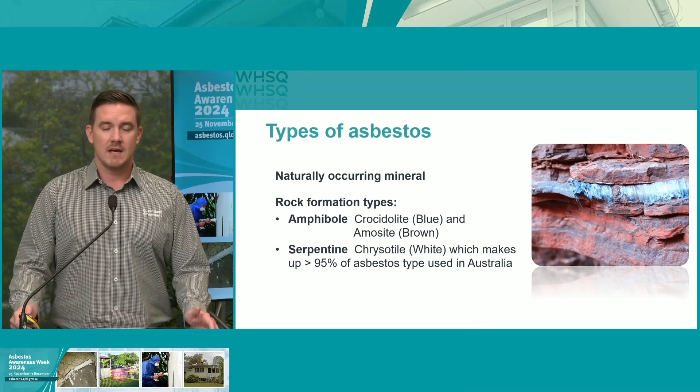So what is asbestos? So asbestos is a naturally occurring mineral. We find this all around the world, including here in Australia. We have 2 specific fibre groups. We have our amphiboles, which are our straight, needle-like asbestos fibres. And within this group, we have crocidolite and amosite, otherwise known as our blue and brown asbestos. And then we have our serpentine fibre group, which are our curly, wavy asbestos fibres. Within this group, we have chrysotile, which is otherwise known as our white asbestos.

So why was asbestos used in building products? So essentially, it was an easily acquired natural resource with many unique properties, including great flexibility, high tensile strength, the ability to insulate from heat. It was non-conductive to electricity and chemically inert, and it was also really affordable at the time. We do know that there's over 3,000 asbestos products, and asbestos can be present in 1 in 3 Australian households.

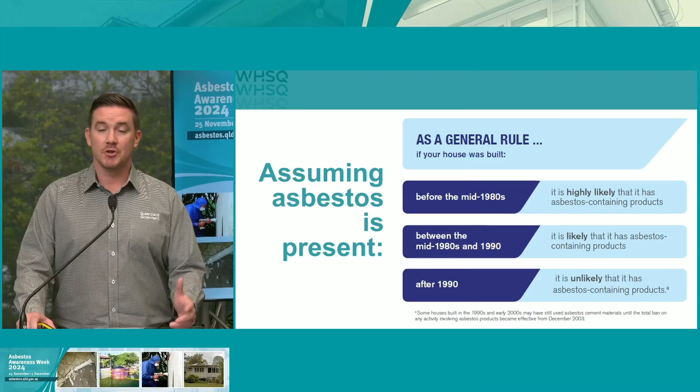So as a general rule, if your property was constructed prior to the mid-1980s, we say that it is highly likely that asbestos will be present. If your property was constructed between the mid-1980s and 1990, we say that it is likely that asbestos will be present. And if your property was constructed after 1990, we say that it is unlikely that asbestos will be present. Now, I should note that the total ban on asbestos came into effect on the 31st of December 2003. So if your property was constructed between this date and 1990, there is a small possibility that asbestos may have been introduced into your home during construction.

Now, when we're looking around our home to determine what could be asbestos, there's a number of things we could look towards. So we have the age of the building, which we just discussed. We also have the era of renovation. So if you have a 1920s or 30s cottage, for example, and you had extensive renovation between the 50s to the 80s, there is a possibility that asbestos may have been introduced into your home during that process. We also have the manufacturer's labels, which you can see in the image on the bottom right-hand side there.

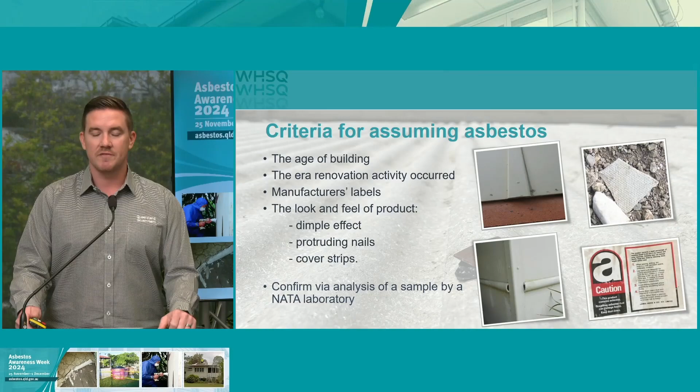These may be placed on the back of some of your sheets at home. We also look at the look and feel of the product. On the left-hand side photos, you can see those cover strips which are indicative of an asbestos product, and also you can see those nails sitting quite proud, which is indicative of a harder asbestos cement sheet. In the top right corner, you can see a fragment of asbestos cement sheet with that dimple pattern, otherwise commonly referred to as golf ball effect or honeycomb, again relatively consistent with asbestos material.

It's important to note that if we're going to be doing any renovations, we must sample any suspect materials and have them analysed at a NATA-accredited laboratory, whether that's going to be your builder, who you need to see proof of those samples from to confirm what's happening, or if you're taking them yourself, you can take them down to a NATA-accredited laboratory.

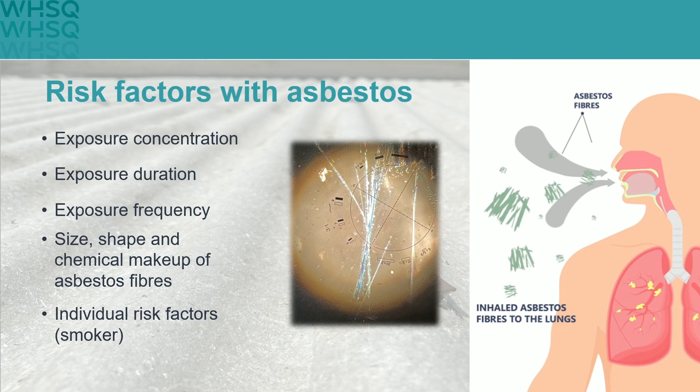There are three main asbestos-related diseases linked to the inhalation of asbestos fibres: asbestosis, lung cancer, and mesothelioma. Now, these are all linked to our exposure concentration, exposure duration, and exposure frequency. Essentially, how many, how often, how long.

We also take into account the size, shape, and chemical makeup of the asbestos fibres, and also our individual risk factors, such as whether you are a smoker. If you are a smoker, you do have a higher chance of developing lung cancer.

Now, before we go down the route of taking our own samples or having a consultant come to our home to undertake an inspection and take those samples for us, it is worthwhile doing our own research to determine what could be around our property. So, I highly recommend you jump onto our asbestos website.

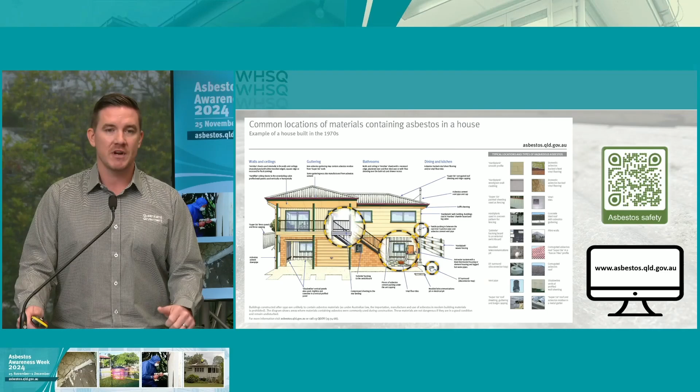We also have these images of common locations of asbestos-containing materials. A lot of people will be familiar with things like the corrugated asbestos cement roof, or similarly the asbestos fence, but there may be some other products in there that people aren't aware of.

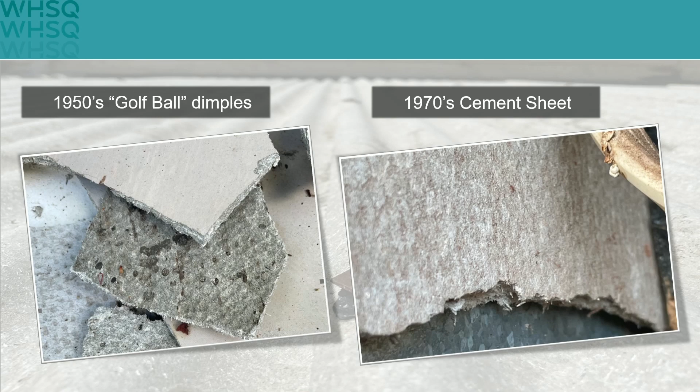Here we have a comparison between some older asbestos cement from the 1950s and some slightly more modern asbestos material from the 70s. On the left, you can see that specific honeycomb golf ball pattern that people refer to with asbestos. But on the right, you can see there's a less prominent print on the back, a slightly different colour, which a lot of people may think is non-asbestos because it doesn't have that honeycomb print. But again, this just reiterates the need for sampling at a NATA-accredited laboratory.

I'm going to run through a couple of products that may be present around your home and your family's home. So we're going to start with probably one of the most common asbestos products.

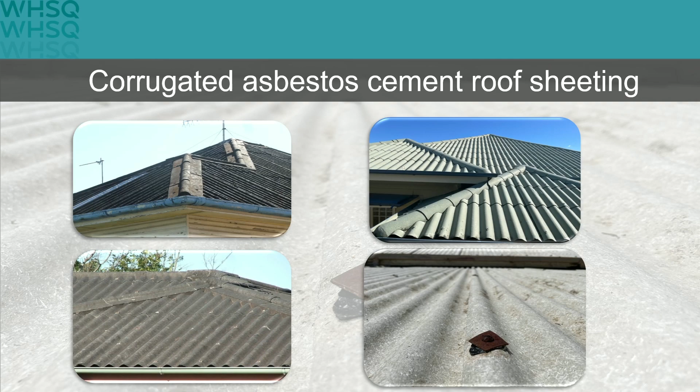We have our asbestos corrugated roof sheeting here. On the left-hand side, you can see there are two Super 6 roof sheets. You can also see there's some ridge capping on the top left photo. In the top right photo, we again have a Super 6 product, this is what we call Tuscan-style roof, so again Super 6, but in a shorter profile of around 750 mils. In the bottom right corner, you can see we have the screw or bolt with the galvanized diamond washer, and beneath this washer you can find a bituminous felt that also contains asbestos.

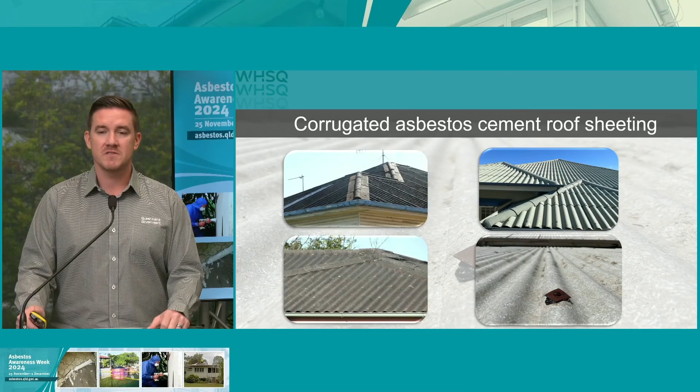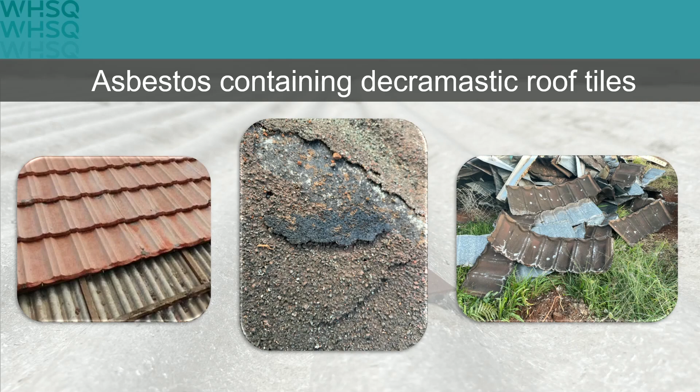Next, we have our decramastic roof tiles. This is a pressed aluminium sheet with a grit-like matrix adhered via an asbestos bituminous product. You can see in the photo on the left-hand side, this will more often be installed over an existing tin or iron roof.

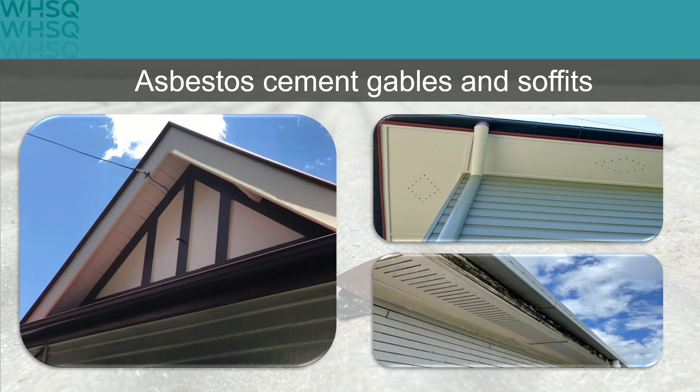On the right-hand side, we have our soffit sheets, where you can see there's multiple different styles of ventilation holes, penetrations, and slots. More often than not, this is going to be a non-friable bonded asbestos cement sheet, but be mindful that this can also contain asbestos low-density boards. So reiterate the need to take samples before you perform any works.

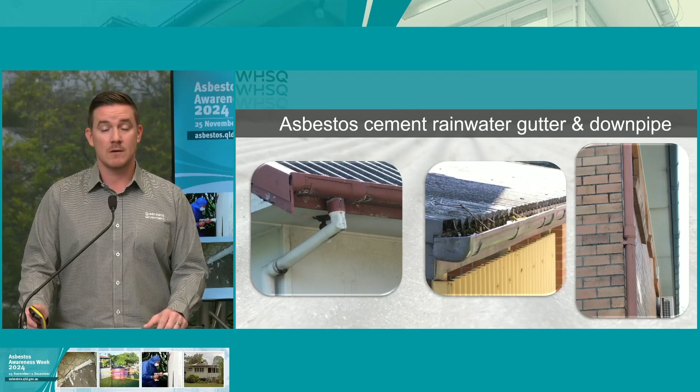So here we have our asbestos cement rainwater gutters and downpipes. More often than not, you are going to see this around an asbestos corrugated roof. However, there may be instances where the corrugated roofing has been removed, but they've left the downpipes behind. So be mindful if you're performing any external or roof renovations.

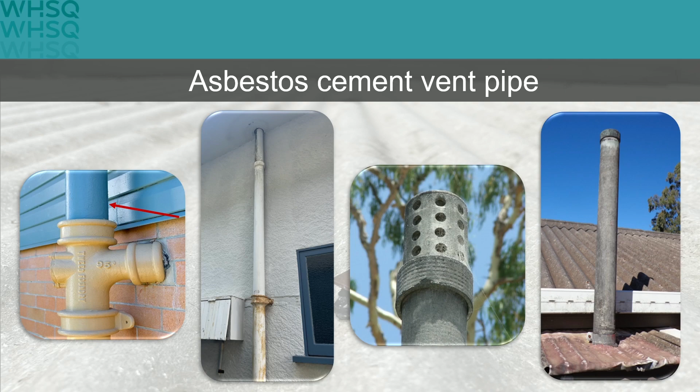Next is our cement vent pipe. You're going to find this externally to the building, adjacent most likely the bathroom toilet. The reason for this is it expels the gases and smells from that area up above the roof line externally. You can see on the two left-hand photos that the bottom section of these pipes will most likely be cast iron, and the top section will be the moulded asbestos cement itself. Where that cement sockets into the T-junction of that cast iron, that can also contain additional asbestos materials.

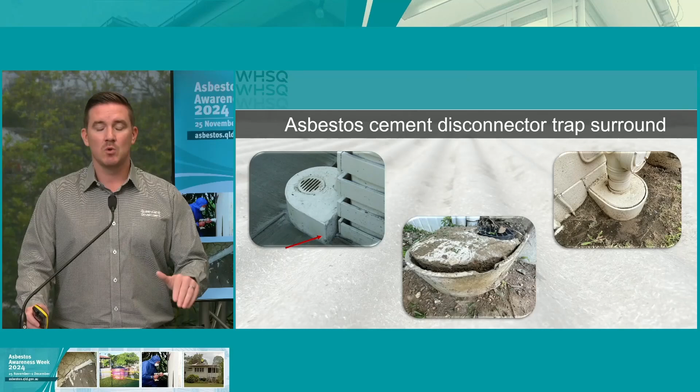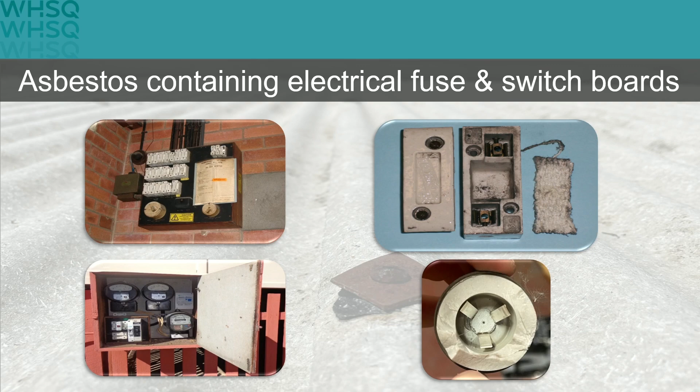In the top right corner we can see our porcelain fuse holder where we have a woven textile friable asbestos pad. In the bottom right corner, this is actually the view inside a ceramic fuse itself. Not all, but there are some fuses out there that contain a friable asbestos pad inside those fuses as well.

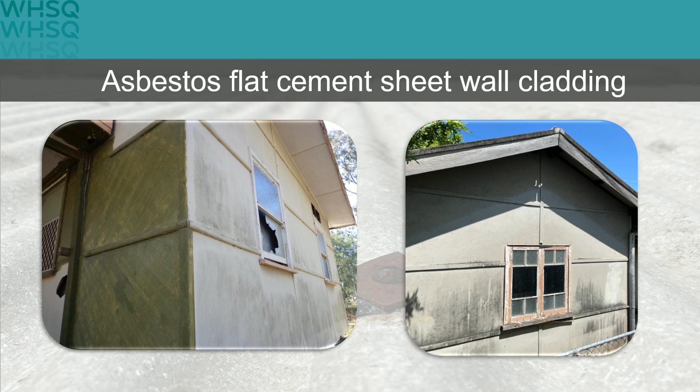So next, again, one of our more common asbestos cement products: flat cement cladding externally. You can see on these two photos that we do have those cover strips. On the left, we have more of a moulded cover strip, whereas on the right, we have a flat cover strip. And now we're going to move into our profile cement wall cladding.

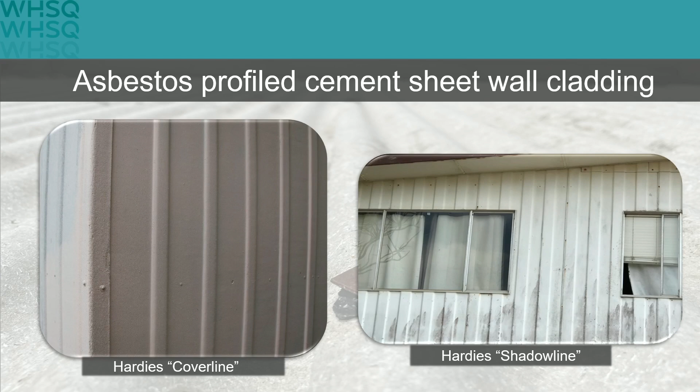On the left-hand side, we have our Hardies Coverline. And on the right, we have our Hardies Shadowline. Important to note, these are probably two of the most predominant profiled cement wall cladding that you'll find in Queensland.

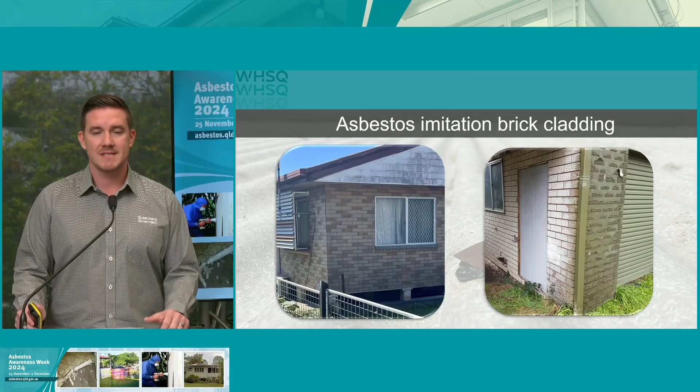A more unique product, we have our imitation brick cladding. Essentially, this is a flat cement sheet cladding around the outside of your property that actually has a brick stencil applied to the outside of that cement product. On the right-hand side photo there, you can see that the stencil itself is actually starting to delaminate through weathering, and you can actually see the joins in the flat cement sheet.

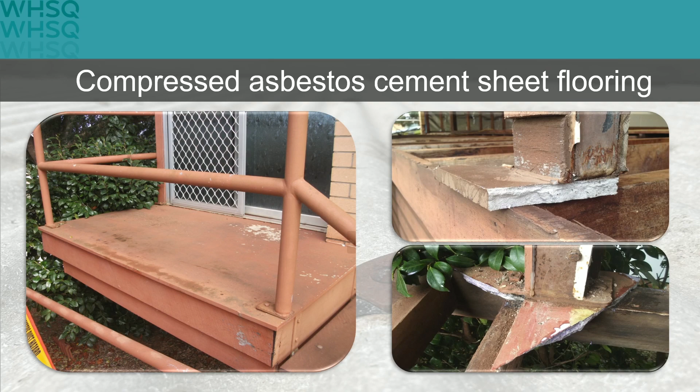Here we have our compressed asbestos cement sheet flooring. Externally, you're typically going to find this around your veranda, your stairwells, or your decking. Again, it can look like timber when not painted. Internally, we can also find this in our bathrooms, our toilets, on our kitchens. More often, it's going to be covered with maybe a ceramic tile.

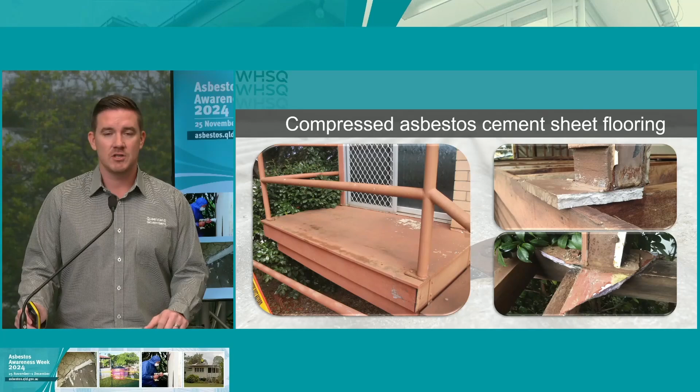So if you do have areas with ceramic tiles, be mindful if you're going to be doing any renovations. Best thing to do in these locations is to actually have a look from the underside of the property if possible. And when you look up to the flooring, you may just see a bright grey sheet and potentially some asbestos warning stickers as well.

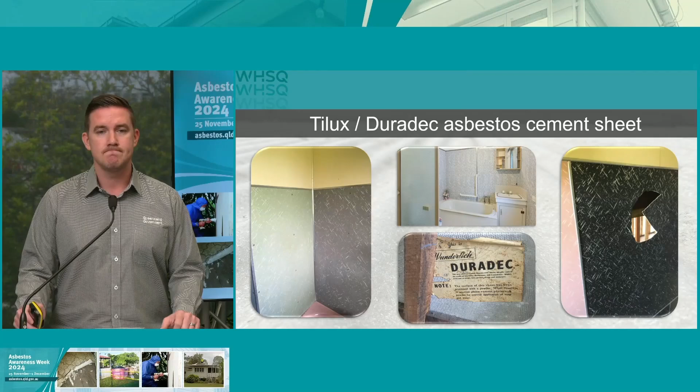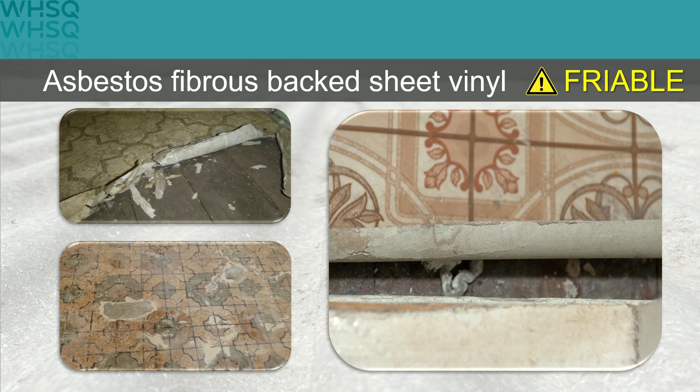So all we ask here is this is something that you cannot touch yourself. The asbestos product is that grey paper to the underside of the vinyl itself, so this is a product that needs to be remediated by a Class A licensed asbestos removalist. And again, if you need any assistance, we do recommend speaking to a competent person or a NATA accredited laboratory for assistance with this product.

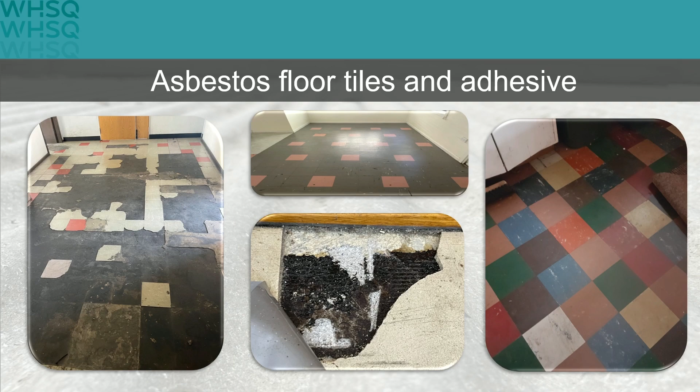Next we have our non-friable asbestos flooring. Unlike vinyl, these particular tiles do not bend. So if you try to remove these, you're going to find that they will snap quite easily, which is demonstrated in that left-hand side photo. Also with this product, you can find black asbestos bituminous material, sometimes referred to as blackjack. From those two photos - the one on the left and the bottom middle - you can see it's a distinct black material that contains asbestos, separate to the tile itself.

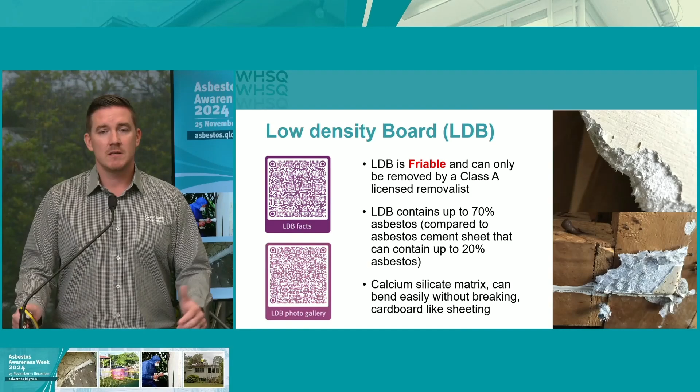Now I'm going to move on to our asbestos low density board, otherwise known as LDB. LDB is a friable product and can only be removed by a Class A licensed asbestos removalist. It has the appearance of a fibre cement sheet, but unlike asbestos cement, which can contain up to 20% asbestos, LDB actually contains up to 70% asbestos. LDB has a calcium silicate matrix, which means it's easily bendable and can't be broken quite easily. From the photo on the right-hand side, you can see this demonstrates more of a tearing effect.

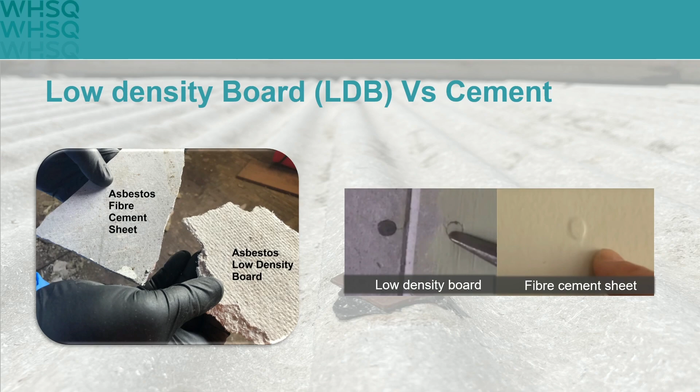As opposed to that, the asbestos cement sheet has more of a clean break. On the right-hand side of that image, you can see there's quite jagged edges. Also, the cement products are typically harder, so those nail heads will sit quite proud. As opposed to the LDB, you can see in that photo it's either flush or most likely countersunk because of how soft the product is.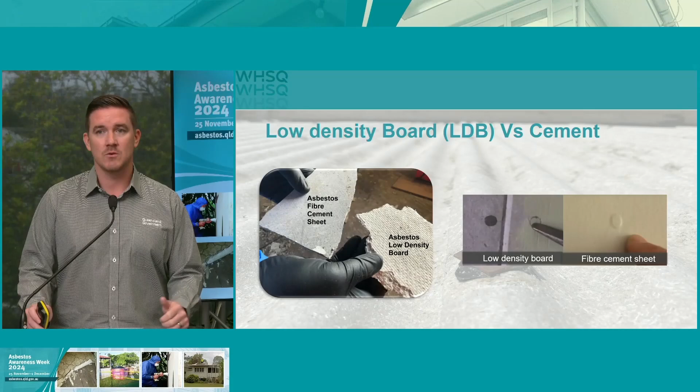Workplace Health and Safety Queensland recommends you engage a licensed asbestos removalist to remove all and any asbestos. However, as a minimum, you must comply with the law, and you must engage an asbestos removalist to remove greater than 10 square metres of non-friable asbestos, any amount of friable asbestos, and more than minor quantities of asbestos dust and debris. Now we have a QR code on the screen - if you scan that, it will pull up a publicly accessible list on our asbestos website, where you'll be able to find A-class and B-class licence holders that are current within Queensland.

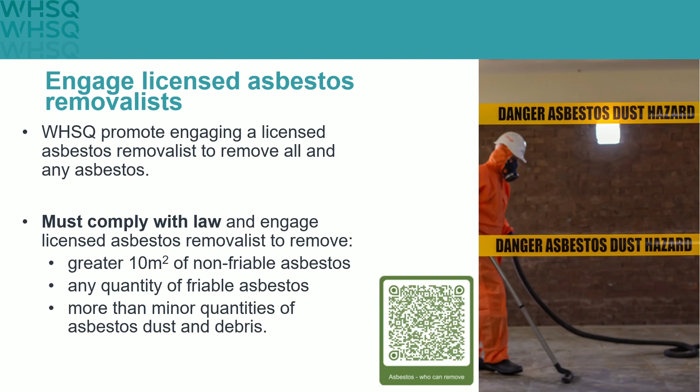Now, controls that apply to all asbestos removal and all asbestos-related works. We do need to make sure we identify our hazards, with asbestos being our primary hazard in this instance. However, we also need to take into account electrics, falls from heights, and other things such as lone working. We need to indicate our asbestos work area with barricading by barrier tape and asbestos signage, to warn of any unauthorised access.

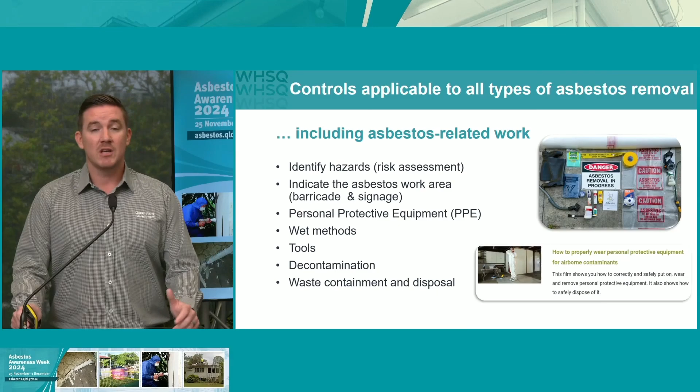Making sure that we wear correct personal protective equipment and respiratory protective equipment, and making sure that's fit for purpose on what we're doing. In most circumstances it's going to be a P2 respirator, disposable coveralls, and most likely gloves. All removal is to be undertaken using wet methods, ensuring that we're minimising any airborne asbestos fibre release, and that we undertake full decontamination on completion.

Now, you can see in the bottom right corner, we do have a link to multiple videos on our website that demonstrate this in more detail, so please feel free to use that resource. And then finally, we just need to make sure that we contain all our waste and dispose of it correctly.

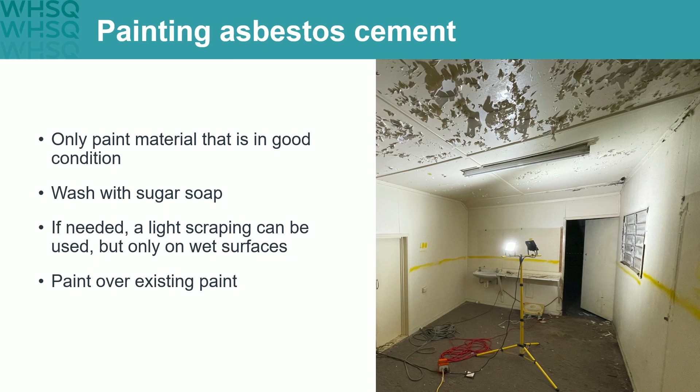If we're required to paint asbestos cement, we need to make sure we only paint asbestos that's in good condition. We can prep the surface with sugar soap, and if need be, scrape smaller areas, maybe around the nail holes, but using the wet method, and making sure we're only painting over existing paint. We don't want to be looking to remove paint from an asbestos surface.

If you're required to drill into asbestos cement, we have a safe work procedure on our website, but in summary we need our PPE, plastic on the ground to capture any potential asbestos release, and we'll place some tape on the wall to ensure the cement product doesn't fracture or crumble.

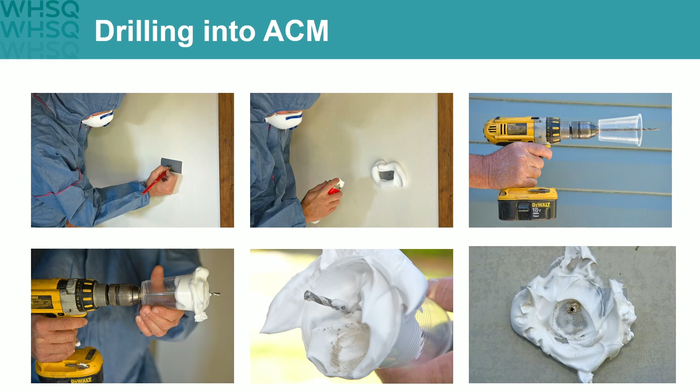We take our shaving foam, spray a small circle around the drill site, then take our battery-operated drill, ensuring it's operated at the lowest possible setting to create the hole. We take a clear disposable plastic cup, place that over the drill bit and fill it with foam. When we place the cup against the wall, we need to make sure we've got a full seal around the drill site to ensure any asbestos dust release is captured within that shaving foam.

Once we've completed the hole, we take the cup and place it in our asbestos waste bag. In the bottom right photo, you can see there's some residual material left on the cement. We take our disposable wet wipes, clean that up, and seal the hole with some PVA glue.

If you need to remove an asbestos cement sheet, a very similar situation applies: we need to cordon off our area with barrier tape and asbestos signage, preventing unauthorised access, and make sure we wear our protective equipment, our RPE and PPE.

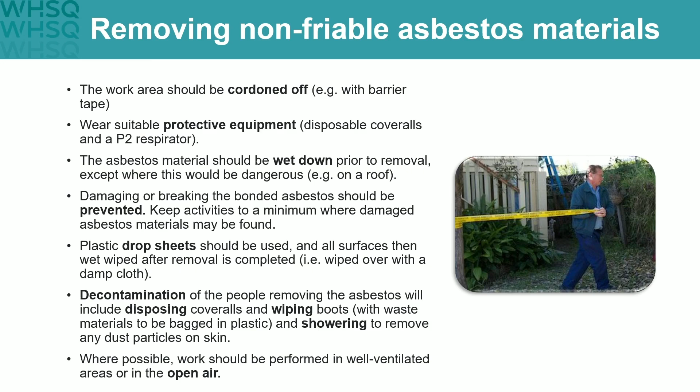We use the wet method, making sure any breakages are kept to an absolute minimum, with a low-pressure handheld spray bottle filled with water and PVA to saturate any dust that may be generated. We also make sure we complete decontamination of ourselves, our equipment, and our work area on completion, and if possible, do this in a well-ventilated open air space.

Once we've completed any of the procedures we just talked about, we need to reiterate: we decontaminate our area and make sure we clean up after ourselves.

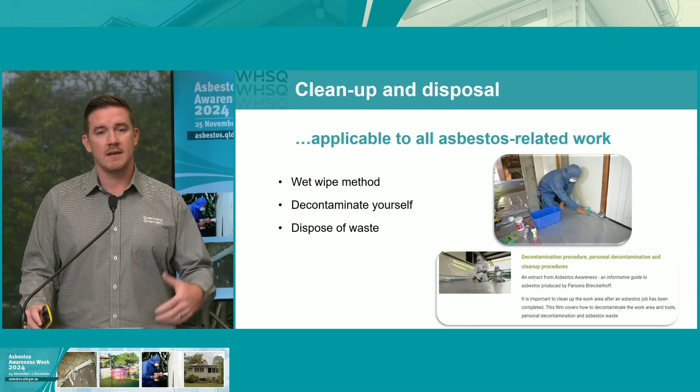For the wet wipe method, we take our disposable wet wipes and wipe the plastic sheeting on the floor, collecting any visible dust and debris. Once we've done one pass, we dispose of that wet wipe, take a new clean wipe, and repeat until the surface and area are fully decontaminated.

Don't forget to decontaminate yourself. You can do that using wet wipes, but you may also want to take a small handheld sprayer filled with water and PVA and spray that down over your suit to capture any potential dust, then make sure you dispose of your waste accordingly.

In the bottom right corner there's a video, again on our asbestos website, that you can use as a resource, which will talk you step by step through that process.

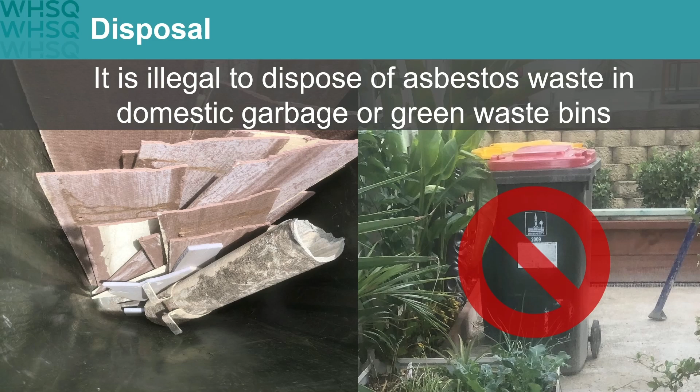We talked about disposal. We need to make sure we never dispose of any amount of asbestos in our domestic garbage bins or our green waste bins. All of our asbestos waste must be disposed of correctly, either by taking it to an accepting waste facility or arranging for a contractor to collect it from your home. Again, we do not want to see any amount of asbestos in our domestic garbage or green waste bins.

All the resources we've just been through, plus many more, are currently available on our asbestos website.

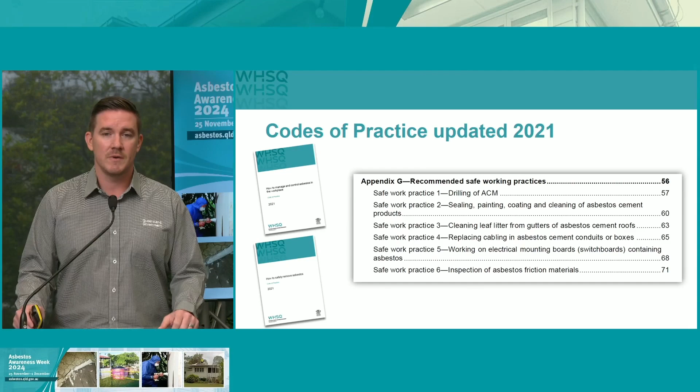We also have our codes of practice for asbestos. There's our How to Safely Remove Asbestos, which has an abundance of material to help you during any process. And then we have our How to Manage and Control Asbestos in the Workplace. In Appendix G of this document, the majority of those scenarios we just talked through are on there, plus a number more.

We have our prohibited activities, so these are the things you cannot do. You cannot use power tools and brooms on asbestos. You mustn't use high-pressure water blasters, compressed air or abrasive blasting, and also never use a domestic vacuum at home, regardless of if it has a HEPA filter. HEPA filtered vacuums are not adequate for asbestos removal. These need to be H-class HEPA asbestos vacuums that you can only get from specific contractors or suppliers.

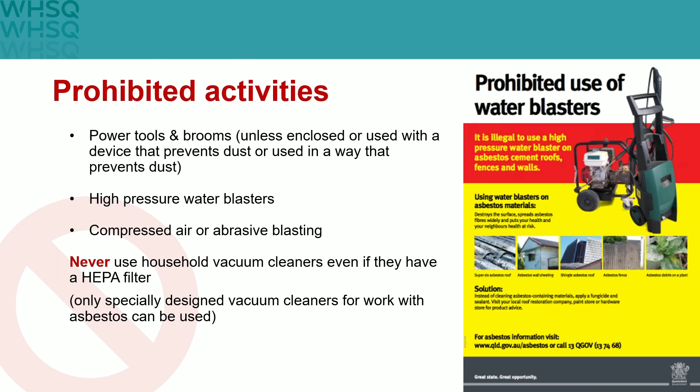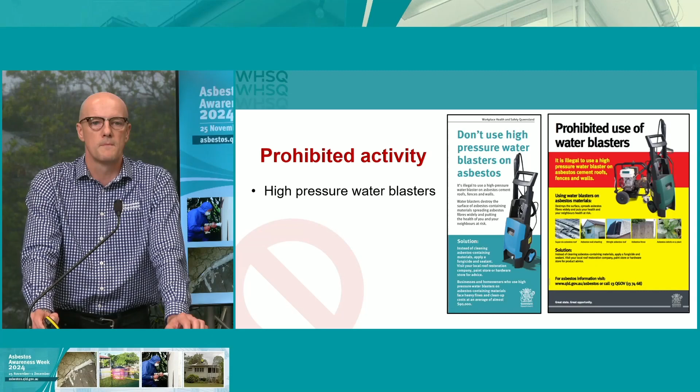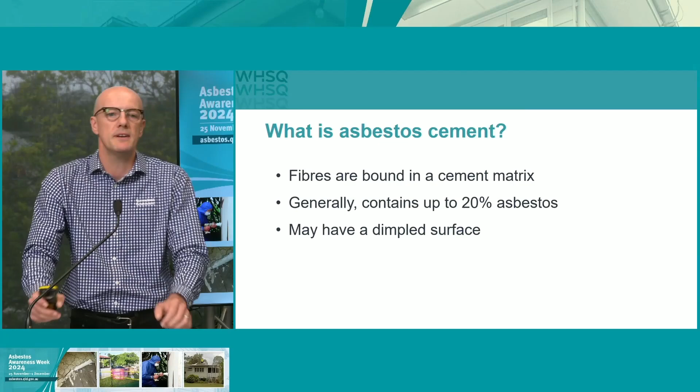So in terms of the asbestos-containing materials we're most likely to encounter around the home, it's going to be asbestos cement. Now, asbestos cement is a hard, brittle product. The fibres are bound in a cement matrix, so they're held in place by the cement. They generally contain up to about 20% asbestos. And as Colin mentioned, there may be a dimpled surface on one side of the product, but we can't always inspect the rear side of these products, so this isn't the only indicator that we use. As asbestos cement is the most commonly encountered material around the home, I'm going to focus on that and the outcome of using high pressure water, especially on asbestos roofs.

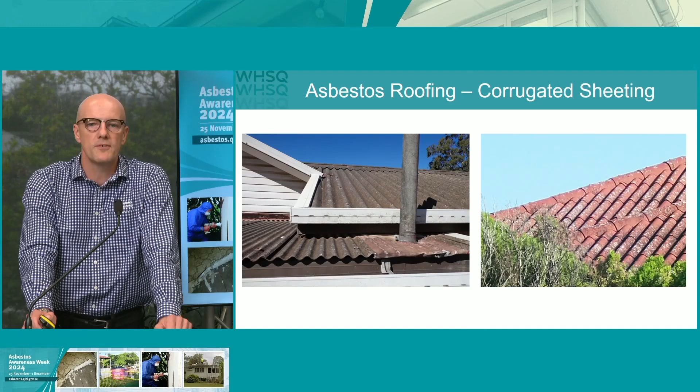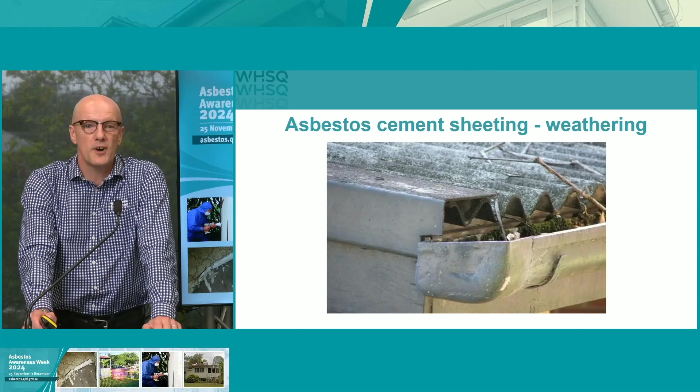So in terms of asbestos-containing materials that are located externally, as they're exposed to the elements, over time they're going to weather. If we think that asbestos-containing materials were phased out in the late 80s, especially your roof or your fence or something like that in your yard is going to be at least 35 years old, if not 45, 50. So over time the surface weathers. So the original light grey colour at production can change into a dark grey, even a black, or maybe have a green tinge to it.

So this is where lichen grows on the surface of the asbestos. And as this lichen grows, the roots of the lichen can go into the very surface of the asbestos-containing material and cause minute fractures and just destabilise the surface. Alternatively, your roof or your fence might be painted, and over time that paint can deteriorate and start flaking.

So in terms of the dangers of using high pressure water, first and foremost, it destroys the surface of the asbestos-containing material. The high pressure nature of the water breaks down the matrix that holds the fibres in place. This can release airborne fibres, and these can stick to everything: your clothes, your shoes, the area where you're working, lawns, trees, bushes, anything in the yard. This contamination can spread over to your neighbours, even potentially out into public areas in the street.

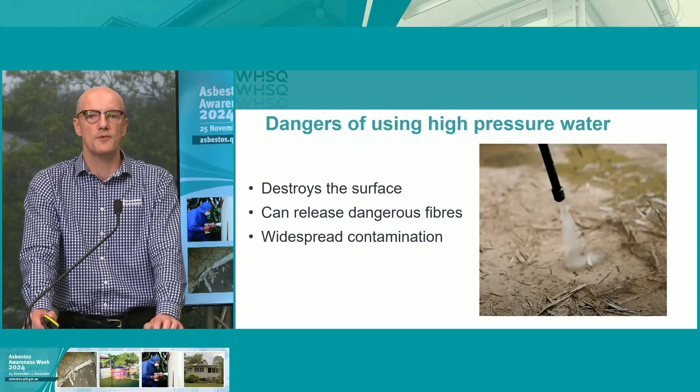Using high pressure water, as it breaks down the asbestos surface, can release dangerous fibres, and these can create a health risk to yourself and those around you. And any areas that become contaminated, in the future, each and every time they're disturbed, again, that can release dangerous airborne fibres, putting your health and the health of those around you at risk.

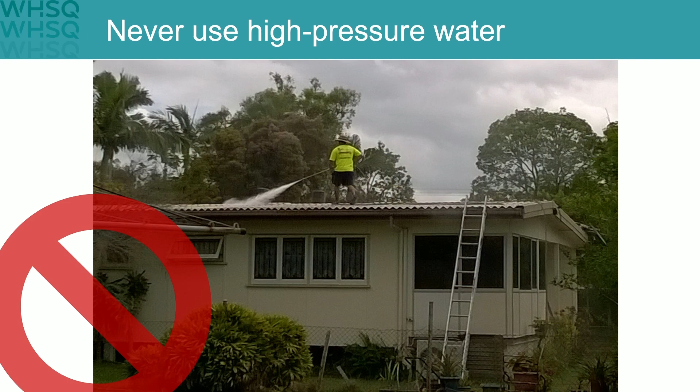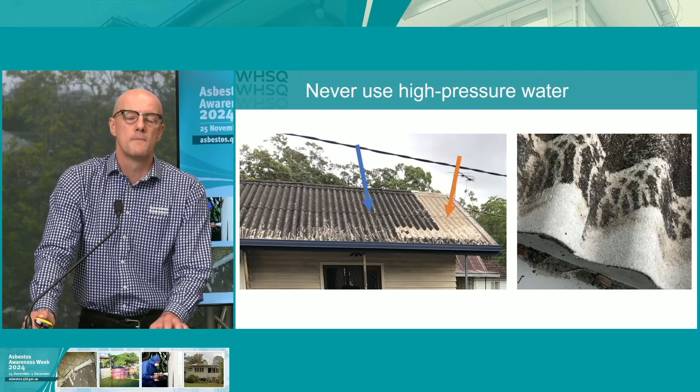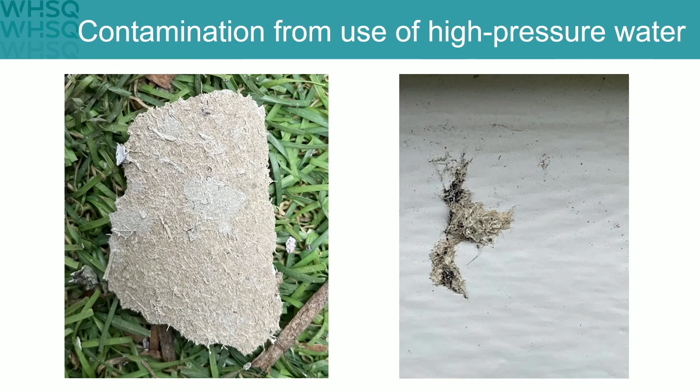So in terms of what this contamination can look like, on the left-hand side is a paint flake. The back of that paint flake has taken all the asbestos off of a roof sheet when high pressure water has been used. And on the right, that's a matted bundle of asbestos fibres, again, that's been stripped off the roof sheet when someone's used high pressure water.

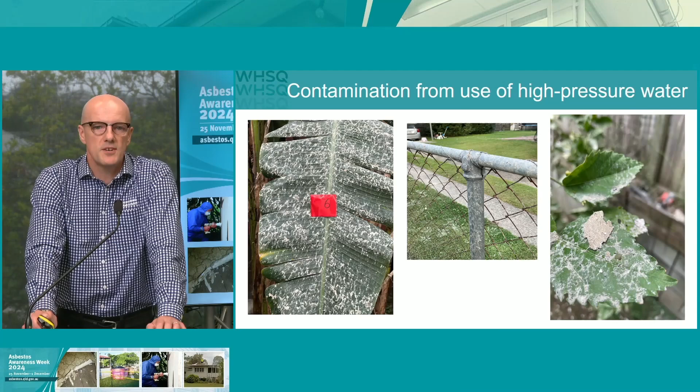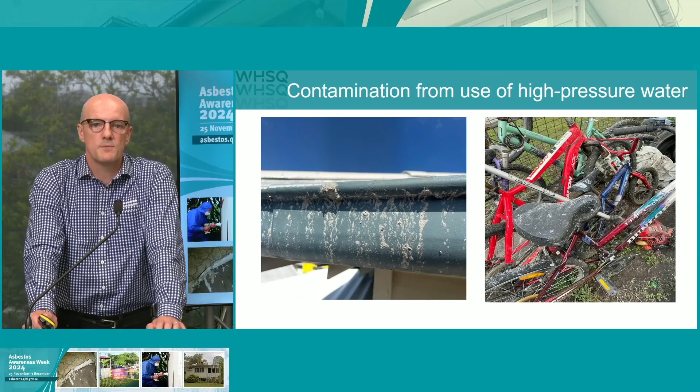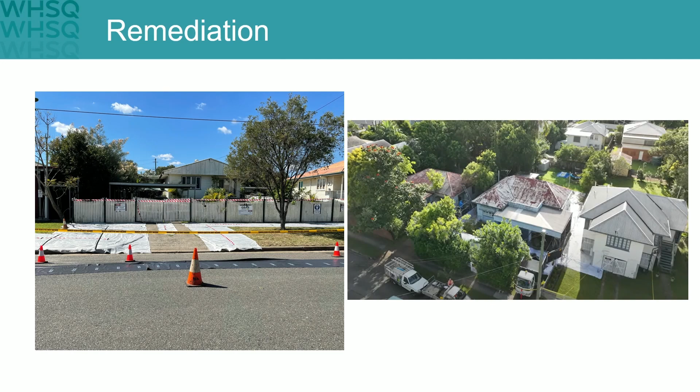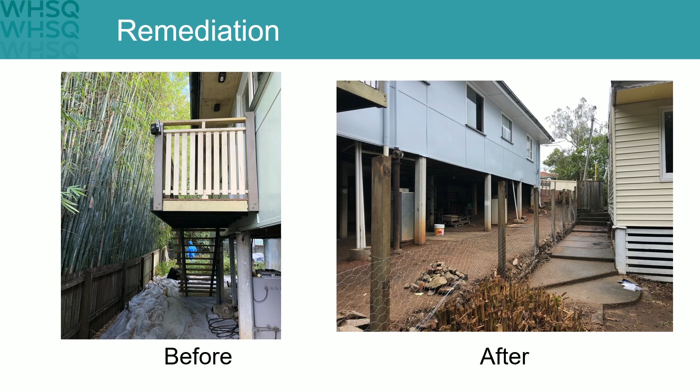In terms of the impact as part of the clean-up, we can see the before and after. So here we've got vegetation and fences. They all had to go because they're all contaminated. The outside of both of these houses completely had to be decontaminated and cleaned down. And the cost here can be significant. This can run into tens of thousands of dollars.

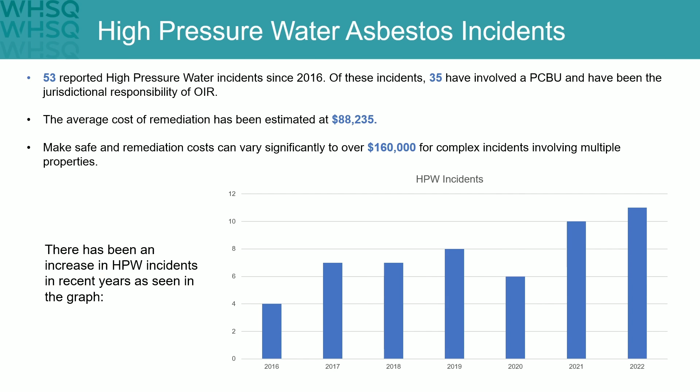So if we look at some statistics, between 2016 and 2022, unfortunately we saw an increase in the number of incidents where high pressure water was used on asbestos. And we had 53 incidents reported through to us. Of these, 35 involved a PCBU, so they were investigated by Workplace Health and Safety. The remainder were homeowners, tenants and renters. So these were passed over to local council and investigated under public health legislation.

We mentioned the cost. So the average cost here was $88,000 to do a clean-up. So please can I reiterate, don't use high pressure water. It's going to put your health at risk. It's going to contaminate yourself and your yard, and you could be left with a clean-up bill of tens of thousands of dollars. On complicated clean-ups, the cost can go up to $160,000 for incidents involving multiple properties.

So if you are thinking about doing any DIY tasks, please follow these 3 steps. So first of all, inspect the area we're going to be working. Know that in a pre-1990 building, it's likely that asbestos is going to be lurking somewhere. Know what asbestos looks like. Know where asbestos-containing materials can be found. If you're unsure, you can assume that asbestos is present, or you can get a sample checked, and that sample has to be analysed at a NATA-accredited laboratory.

If you're unsure of how to identify asbestos or to safely take a sample, you can engage a trained professional to assist. And lastly, prepare. So if asbestos has been identified in your work area or near to your work area and it's likely to be disturbed, as Colin mentioned earlier, we always recommend using a licensed asbestos removalist, but there are some safe work procedures that you can follow.

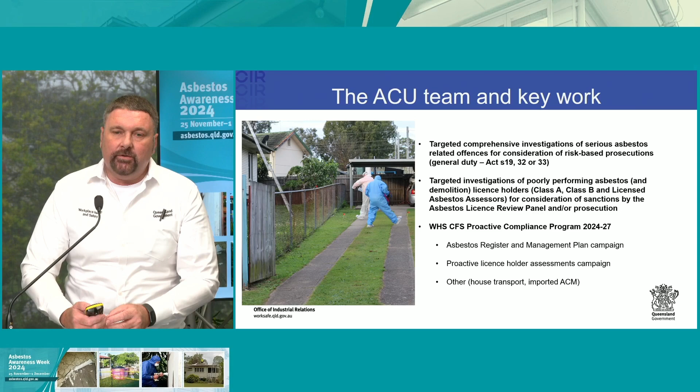In 2017, OIR's Asbestos Unit commenced the Robust Asbestos Regulator Program. The Asbestos Compliance Unit is a continuation of that work. The key work of the unit, as Bomber mentioned, was targeted comprehensive investigation of serious asbestos-related offences for consideration of risk-based prosecutions, targeted investigations of poor-performing asbestos licence holders for consideration of sanctions by the Asbestos Licence Review Panel, and the Compliance and Field Services Proactive Compliance Program 2024 to 2027.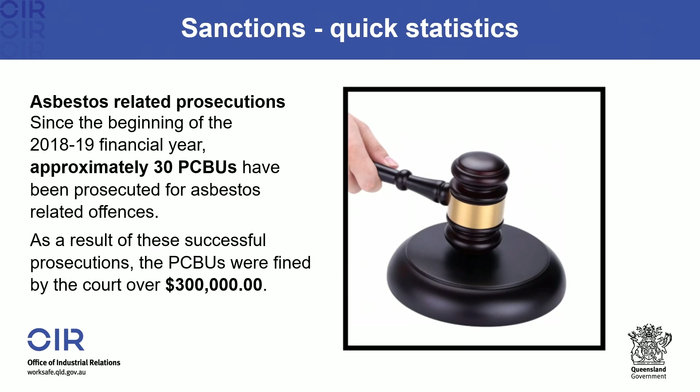Some quick statistics. Asbestos-related prosecutions. Since the beginning of the 2018-2019 financial year, approximately 30 separate entities have been prosecuted for asbestos-related offences, and as a result of these successful prosecutions, the offenders were fined by the court over $300,000 and ordered to pay approximately $80,000 in remediation costs.

Since the beginning of the 2018-2019 financial year, OIR has sanctioned 23 asbestos licence holders. These include both licensed asbestos removalists and licensed asbestos assessors. These sanctions have included issuing warnings, adding conditions, or, where appropriate, the licences are suspended or cancelled.

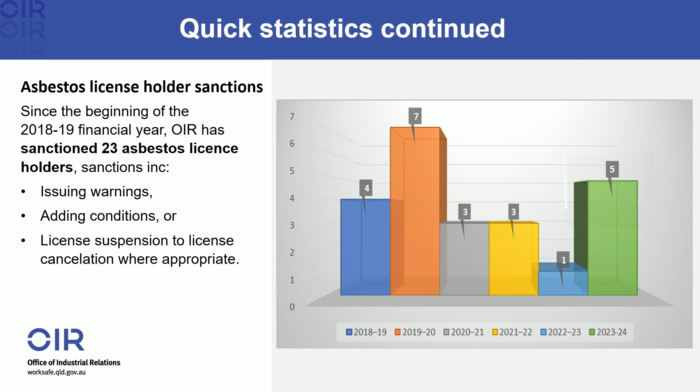Regarding the Compliance and Field Services Proactive Compliance Program 2024 to 2027, this year the asbestos management campaign commenced on the 1st of August and ran to the end of October. The majority of this work was completed by the Compliance and Field Services Inspectorate. Inspectors throughout the state conducted 182 campaign assessments and issued 151 enforcement notices, including 6 infringement notices.

Of the notices issued, the majority have been for failing to clearly indicate the presence and locations of asbestos and failing to ensure asbestos registers are prepared and kept at the workplace, and reviewed.

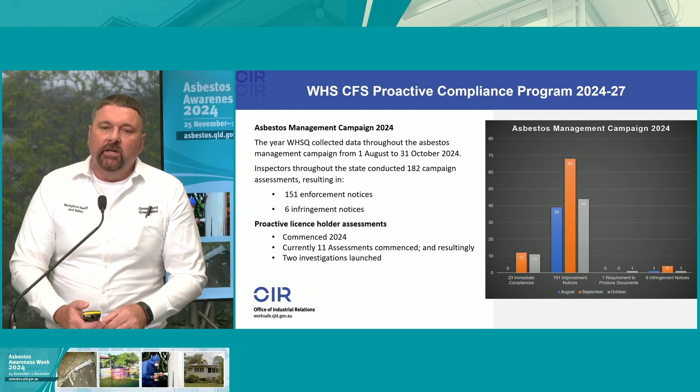Also, the Asbestos Compliance Unit has commenced the proactive licence holder assessment campaign. This campaign levers off performance statistics, and currently 11 assessments have been commenced, and resultingly 2 investigations have been launched. And we have other small-scale campaigns running that focus on housing, transport and imported asbestos.

In the past 6 financial years, OIR have issued over 300 infringement notices for asbestos-related contraventions, totalling over $500,000 in on-the-spot fines.

Now let's have a look at some case studies. The first concerns an unlicensed demolisher who faced court mid-December last year for offences of failing to manage risk arising from asbestos-containing materials during demolition of a domestic premises. On 2 occasions, the defendant demolished domestic premises at suburban addresses in Brisbane which contained asbestos-containing material in accordance with contracts they entered into with the homeowners.

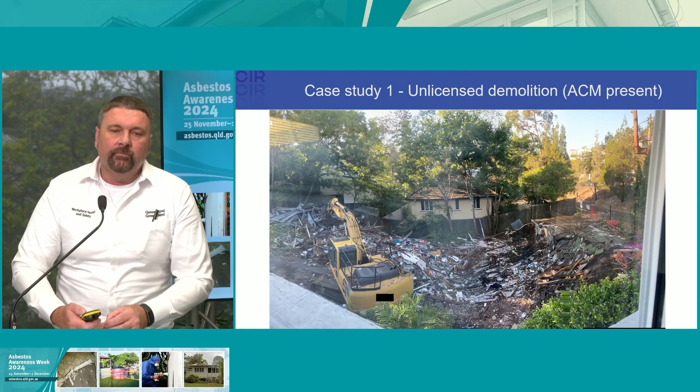On both occasions, the defendants failed to safely remove asbestos sheeting before demolishing the house with an excavator. This caused the breakage of asbestos sheeting and the release of asbestos fibres. In both cases, our inspectors attended the site and issued a number of statutory notices to the defendant. These included notices requiring the safe removal and disposal of asbestos waste.

The defendant failed to comply with those notices, and the property owners had to engage alternate demolition and asbestos removalists to remediate those sites. The extra costs and the delays on these jobs caused the existing building contracts to expire, and the losses to those homeowners were in the tens of thousands of dollars.

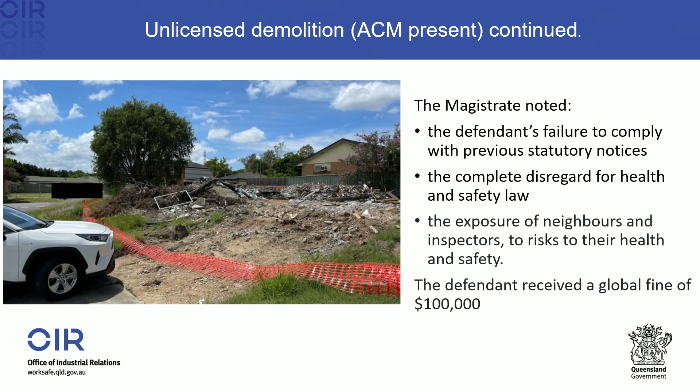In sentencing the defendant, the magistrate observed the defendant's failure to comply with statutory notices, their complete disregard for health and safety law, and that they exposed neighbours and inspectors to risk. A global fine of $100,000 for all offences was issued to the defendant. The magistrate remarked that such a fine was modest in the circumstances, and a conviction was recorded against the defendant.

Moving on, in the past 12 months, we've had 5 cases heard in court where high-pressure water was used on asbestos. In March 2024, a case proceeded to trial where the corporate defendant and the individual defendant pleaded not guilty on the ground that they were not informed that the roof was an asbestos-containing material. 10 witnesses were called, including expert witnesses.

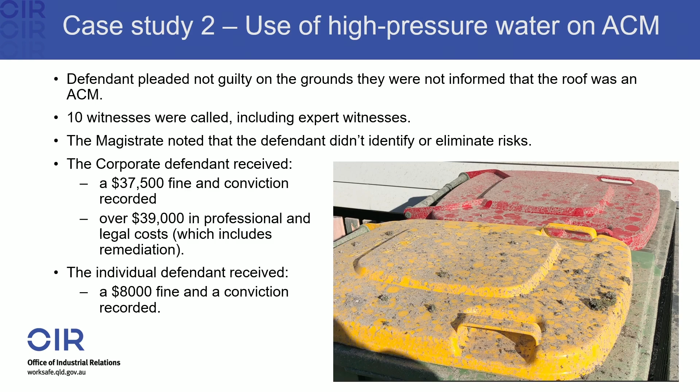Both parties were found guilty on all charges, and the magistrate noted that the defendant didn't identify or eliminate risks, and it was also an aggravating feature that the defendant held a commercial trade licence. The corporate defendant received a $37,500 fine and a conviction recorded, and over $39,000 in professional and legal costs, which included the remediation costs. The individual defendant received an $8,000 fine and a conviction recorded.

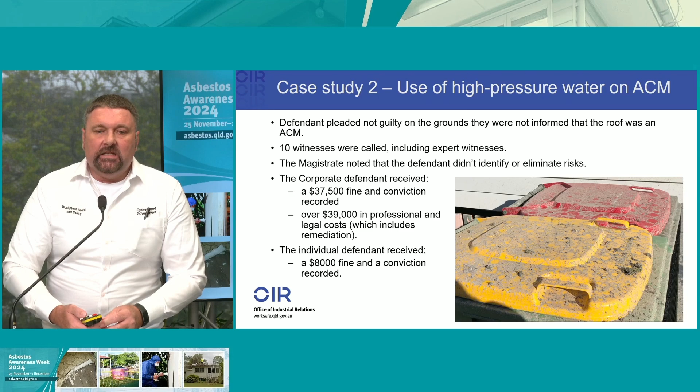In August 2024, a sole trading roofing contractor was sentenced in Brisbane Magistrates Court. The defendant did not cooperate with the investigation. The magistrate considered the offending was aggravated, as the defendant had been told that the roof was an asbestos-containing material before he had accepted the work. The defendant received a $10,000 fine and over $55,000 in professional and legal costs, which includes remediation.

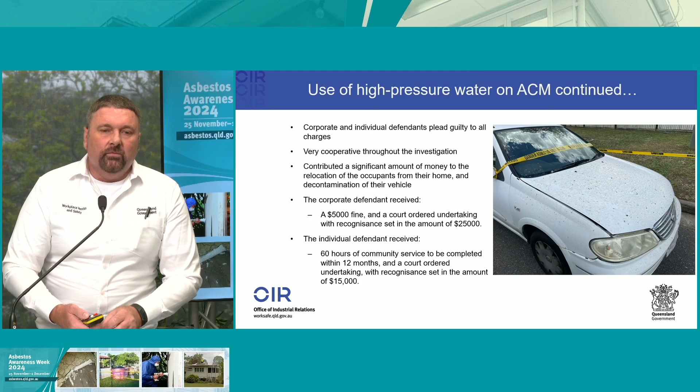Another case was heard where the corporate and individual defendants pleaded guilty to all charges. They were very cooperative throughout the investigation, and they had contributed a significant amount of money to the relocation of the occupants from their homes and also for the decontamination of their vehicle. The corporate defendant received a $5,000 fine and a court-ordered undertaking with recognizance set in the amount of $25,000. This court-ordered undertaking is essentially a suspended sentence. The individual defendant received 60 hours of community service and a court-ordered undertaking with recognizance set in the amount of $15,000.

So that's all for my presentation, apart from to say that there are no fines and no prosecutions when asbestos work is done properly. And those are my best days at work, when we go to site and see everything done in compliance with the Act and Code of Practice. Thanks, mate.

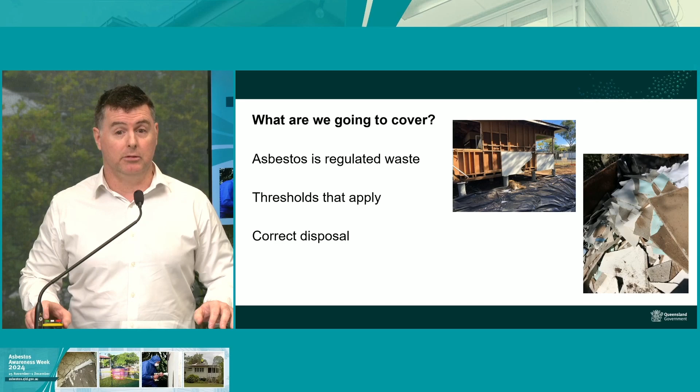So there's two main pieces of legislation that the department administers that relate to asbestos. There's the Environmental Protection Act, which is all the licensing, that's where the transport is covered. It covers environmental harm. And then we have the Waste Reduction and Recycling Act, which is where our illegal dumping provisions and also the waste levy provisions apply.

So in Queensland, we have three broad categories of waste. So we have general waste. That's your municipal solid waste, your general household waste. That could be green waste, bricks, concrete, low risk. But then we have two categories of regulated waste. So regulated wastes are the higher risk wastes. And we separate them into two separate categories as well. So category 1 is the highest risk, and category 2 is that lower risk. So they are still differing levels of risk depending on what the material is, but still very important to consider.

So here's a little snip out of the back end of the Environmental Protection Regulation. So Schedule 9, this is where the different elements that come up as regulated waste. You'll see on the right there's a column with 1s and 2s, and that's the different categories of regulated wastes. We've got asbestos there, and it's a Category 2 regulated waste.

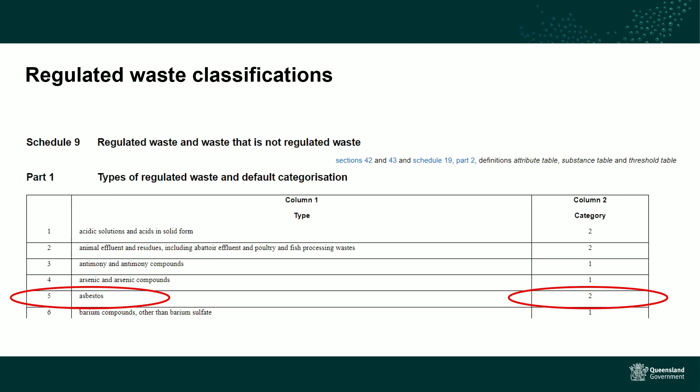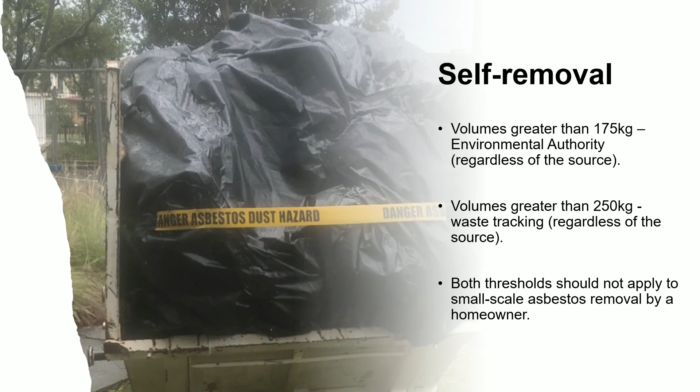So self-removal. Generally speaking, if you're staying within that 10 square metre rule, it should remain less than 175 kilograms in weight, but be mindful that different asbestos materials are of different densities. So why that 175 kilogram level is important is because that's the threshold for when regulated waste transport licensing is required. So if you start removing large volumes, and this is what our commercial operators should all be holding, those who are doing that large-scale asbestos removal.

They should also be licensed transporters and hold an environmental authority, which is essentially a licence to transport that waste. Now, waste tracking is the other element that coincides. There's a 250 kilogram threshold for that on a non-commercial basis, so there's no threshold for commercial transportation. Every single commercial operator who transports asbestos is required to complete waste tracking. Waste tracking is an administrative function that enables the department to have oversight over where those regulated, high hazard wastes are being generated, who is transporting them, and where they're going. So again, that 10 square metre rule, given you're doing it on your own, should put you below that threshold.

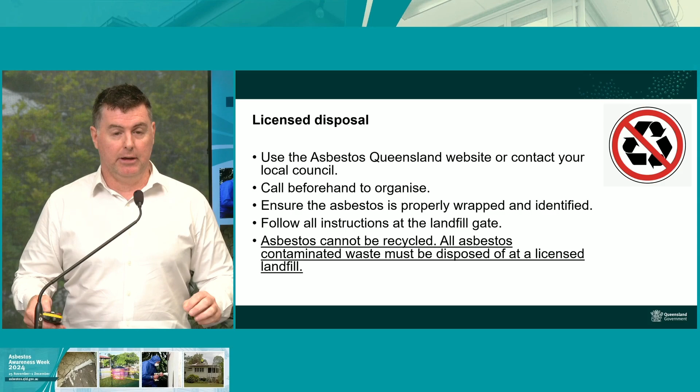It does need to be wrapped, no matter how small. You can use wrapping, or you can simply use a good plastic bag, but it needs to be of a decent quality that it's not going to accidentally tear. So not a small freezer bag or something like that, a good quality plastic bag. Once you've confirmed that you can attend the landfill, do follow their instructions when you get to the landfill gate, because sometimes they may have special areas where they put the asbestos. So if you're used to travelling to the same location to dispose of your waste, that may be different now that you've got some asbestos to dispose of.

So just to summarise, the Asbestos Queensland website is your friend. There is a lot of information available on that site. It cannot be recycled, it must be disposed of, not in your red top wheelie bin. Take it to a licensed waste disposal facility. And then, of course, if you have any questions or concerns, either contact the department or the Office of Industrial Relations, the Asbestos Safety Regulator, at any time. Thank you very much.